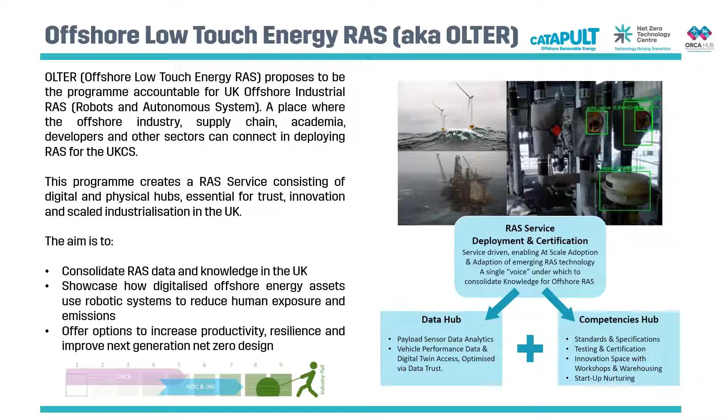No, thank you, Sakshi. And I think as well, if there are some more detailed questions, Andy Bell, who heads up the OLTER program for NZTC, we can take those questions away and get back through email afterwards. But that was a fascinating look at the OLTER program, and I, for one, am really excited to see how that develops over the coming years. So thank you very much, Sakshi.

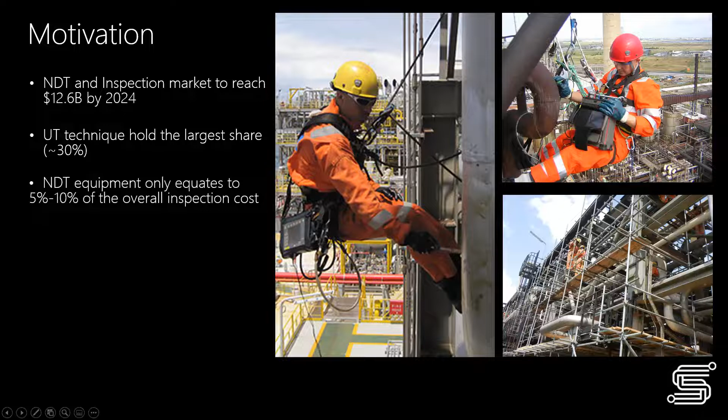The current market position and issues facing the industry: the NDT inspection market is set to grow to 13 billion by 2024, and around 30% of that is ultrasonic testing techniques. But in traditional testing scenarios, only 5 to 10% of the costs are associated with the instruments and technologies themselves. The major costs are associated with access costs or labor costs, like rope access or scaffolding.

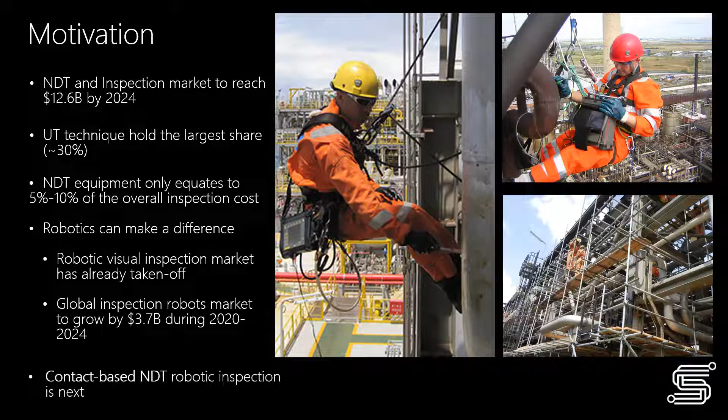So it is clear that robotics can help and make a difference. We've already seen the visual inspection market take off, and the global inspection robot market is set to grow by around 4 billion by 2024. The next logical step is essentially contact-based NDT inspections.

To walk you through the current technologies out there: on one hand, we have contact-based piezoelectric technologies, where a piezoelectric element generates ultrasound, using a couplant like water or gel to transmit that ultrasound to a structure to obtain inspection data. On the positive side, they have good sensitivity and are quite compact and light, but because you require a coupling medium, you need surface preparation, and they also have quite poor high temperature performance, which doesn't make them ideal for robotics implementation.

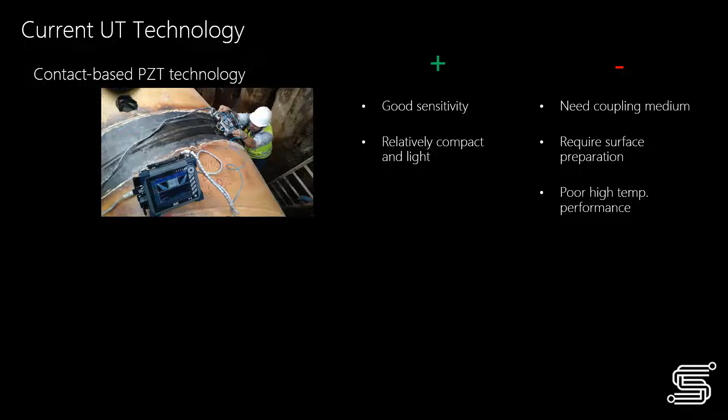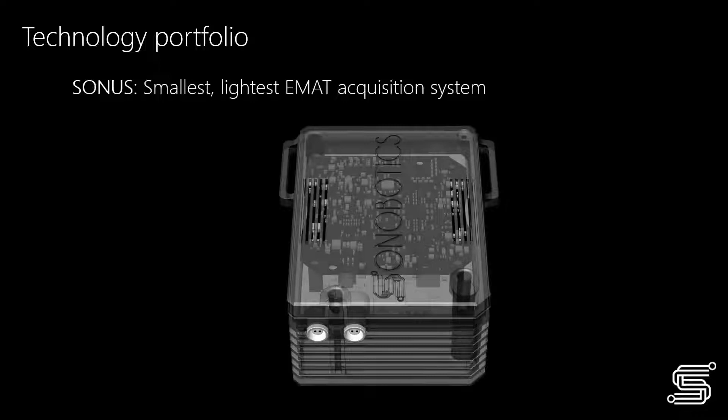Our current technology that is commercially available is Sonus, which is the smallest and lightest EMAT acquisition system on the market. It is ultralight, designed to be used on all types of robots, and weighs under 290 grams. It is fully wireless, transmitting all data wirelessly to a base station or a robot.

Because it's quite important for the robotics community to have that ultrasonic or inspection data readily available to be integrated in all sorts of ways, the system has a robotic operating system on board, which allows it to seamlessly talk to all robotic platforms working with the system. It has powerful signal processing and acquisition systems on board, so all data processing and signal acquisition is done on board, and the end result is wirelessly output to the robot.

It is very low power, so it can be quite light and small, and it is battery powered, making it ideal for implementation on platforms where payload is quite critical, such as drones. The system's capabilities include non-contact thickness measurement for corrosion mapping, and it has 2 independent channels which can be used for defect or crack detection. We're also working on adding capabilities for rapid structure screening from single points, without needing to scan the entire structure.

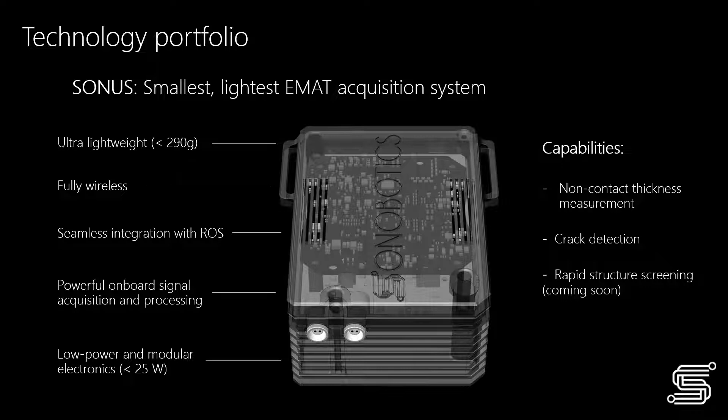So to go along with that acquisition system, we have essentially the sensor heads. Different types of EMATs are used for different types of inspection, for different needs. Let me show you the system being implemented.

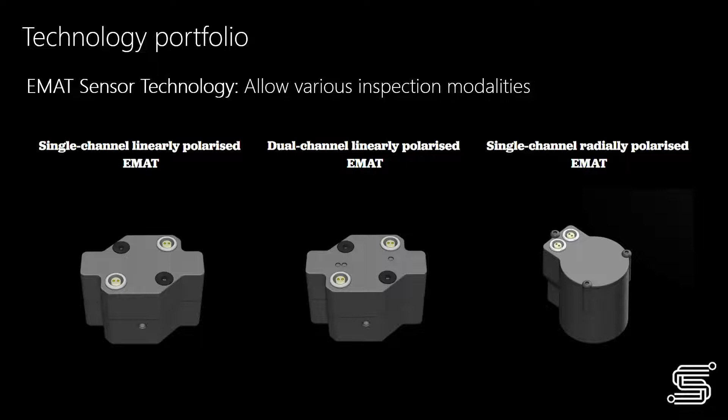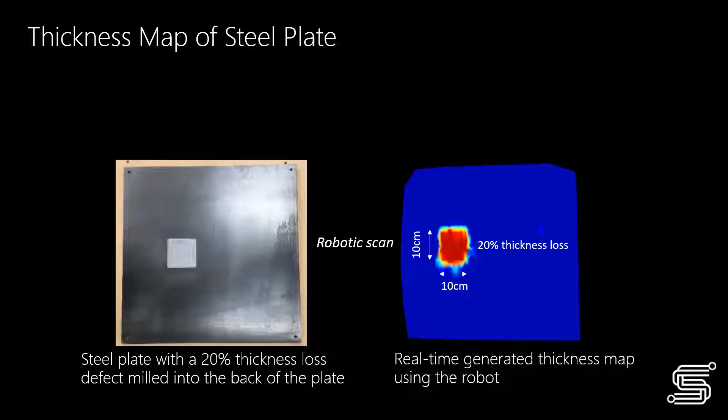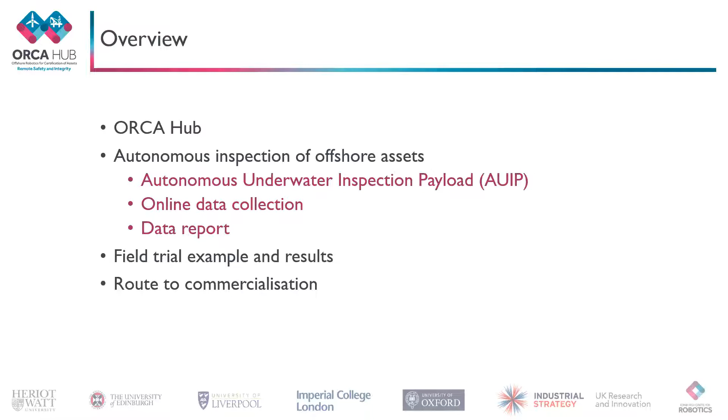Next, please. So the first line, if you go to Orca's webpage, says the Orca Hub is a multi-million-pound program aimed at addressing the offshore energy industry's vision for a completely autonomous offshore energy field. This is pretty much exactly what we are trying to do. We are looking at how to combine autonomy, path planning and control with mapping, surveying, and inspection to pretty much release a robot close to an offshore asset. Then the robot will do the complete inspection and return telling us it's done so we can retrieve it. This has multiple benefits: it can improve the efficiency of the inspection while reducing human risks as we move them to onshore instead of offshore, which also can reduce the cost and the carbon footprint.

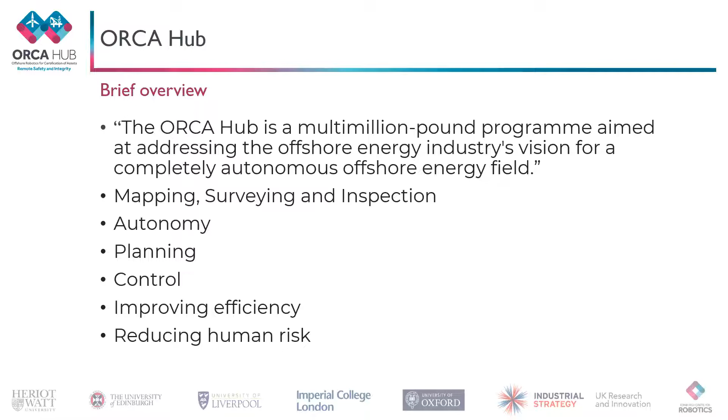Next, please. In this image, you can see we have a Falcon equipped with our autonomous underwater inspection payload, which is the yellow housing sitting below it. This housing contains a stereo camera setup, a DVL, a fiber optic gyro, an IMU, a pressure sensor, and in this case also a sonar. We can also attach any type of additional sensors to this, and we've also been using it with manipulators. It also contains additional computational and graphical processing units, so we can run all of our system online on board.

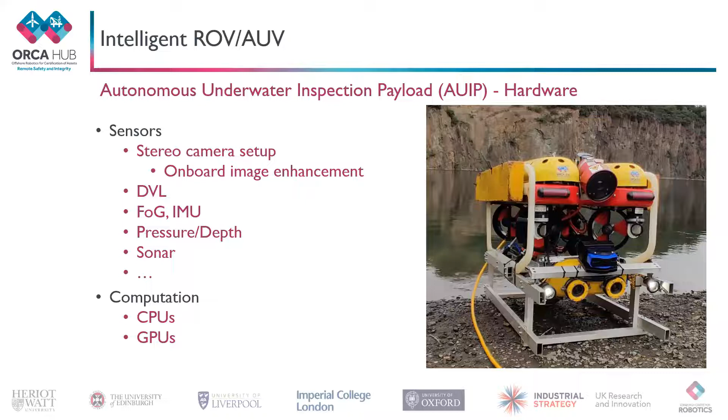Thank you. So one of our main software components is our simultaneous localization and mapping system. This is tracking features in the environment to create a map while it's localizing itself. It's doing this with enhanced images as well as dehazing, and this can increase our viewing range from what in the North Sea is probably a few meters on a good day to usually at least twice where the distance where we can still reliably track features. In addition to just tracking features, we integrate all the internal navigational systems and sensors, as well as doing an autonomous online calibration between all of these different motion estimators. So we don't need to have a precise model of how everything is connected to each other in the beginning, but it will figure this out over time.

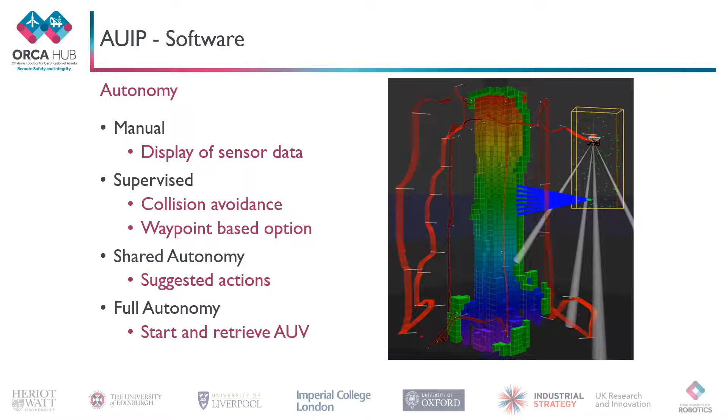Next, please. I think you skipped one. Yeah, thank you.

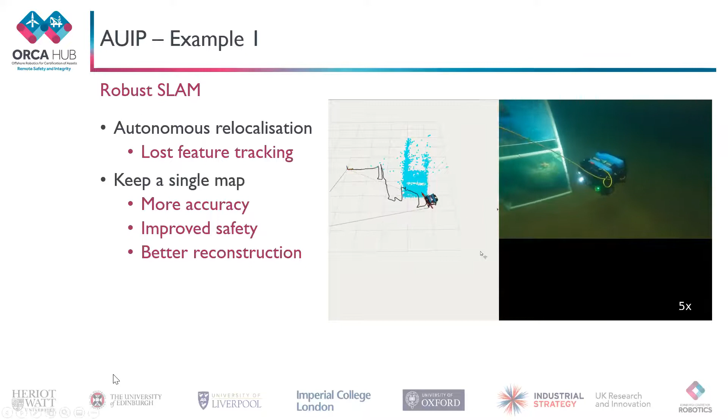One thing we've done is improve the SLAM based on having it work together with the autonomy. So if we lose feature tracking during operation, it is autonomously able to go back to a point where it thinks it has a good chance of relocalizing itself within a previous map.

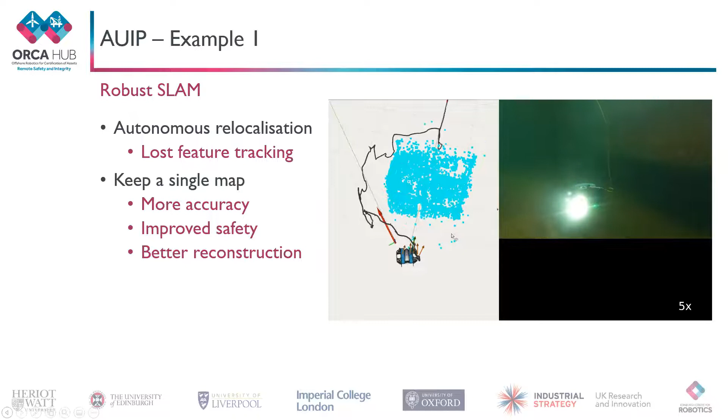And this has multiple benefits. The main point is to keep a single map of the environment, which means better accuracy, which in turn means improved safety because you know more precisely where objects are, so you won't collide with them. It's also beneficial for performing reconstruction in the end.

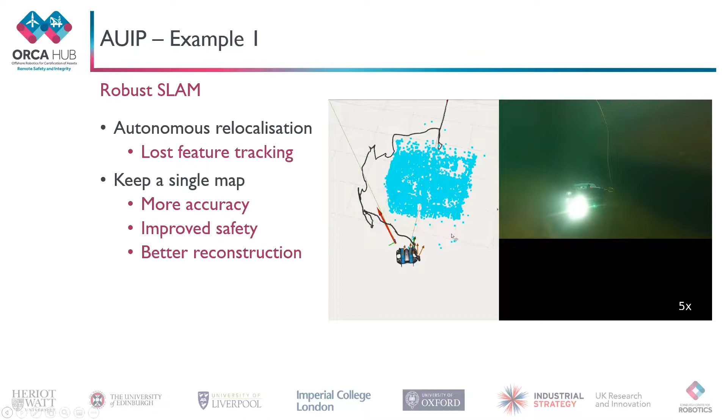Another example of what we're aiming to do in the end is shown here, where we do an autonomous inspection of an offshore wind turbine. In this example, the robot has no idea about what is around it. It just knows it needs to inspect something.

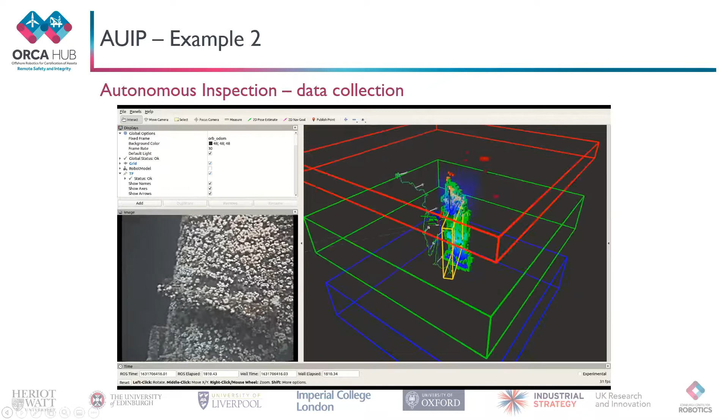So it is started close to an object, and then it will start to try to find out what it should do next to get new information about this object. Now you can see it jumped forward a bit in the movie, and it has started to map a part of this structure. It will continue doing so until it thinks it's done with the current task.

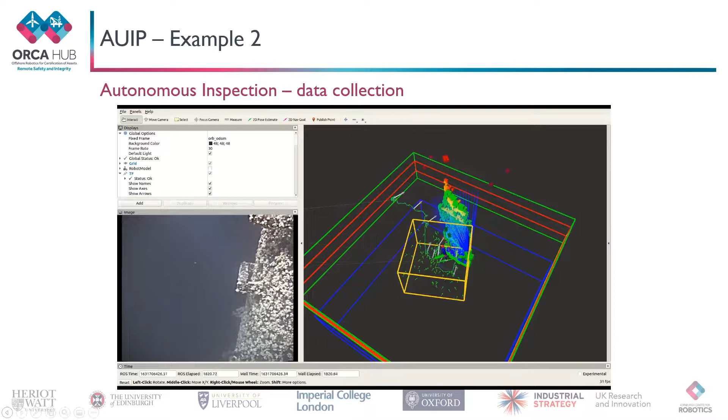Here we didn't do the whole thing because we had some issues with the very strong currents at the operation. It will soon move forward a bit where we see a larger piece of the structure has actually been mapped.

Here you can see the different suggestions the robot has made. So while it's in full autonomy mode here, an operator could also select one of these displayed poses if they think it's a better option to go to, and the robot will go there.

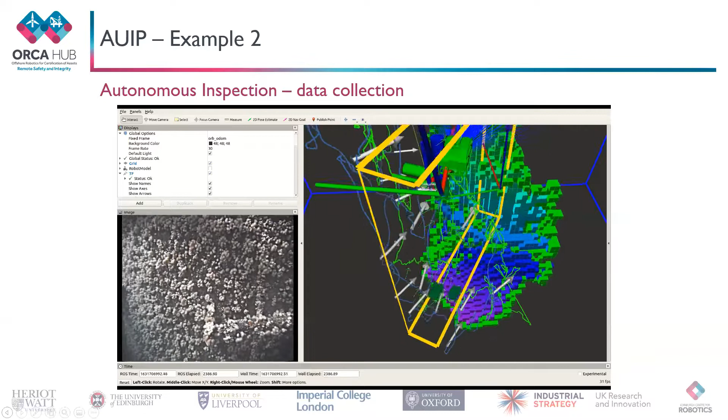So we can go to next, please. And from the same inspection, this model was generated. After the mission, what you're interested in is the data, and here is a 3D, up-to-scale representation of this with color correction.

You could then zoom in on the model, look at the very detailed parts of this, or measure the size of things by clicking and dragging or just clicking. We want to do multiple tests at the same point over time to be able to make some analysis about how the biofouling is changing.

Is there more corrosion somewhere? Has there been new damage, or has any of it grown so it needs repair? And how are the surroundings? Is the scour protection still good at the bottom, and so on?

And I think this would be very important to do, as we've seen last week on the east side of the UK, where we had massive storms damaging a lot of, changing the land a lot.

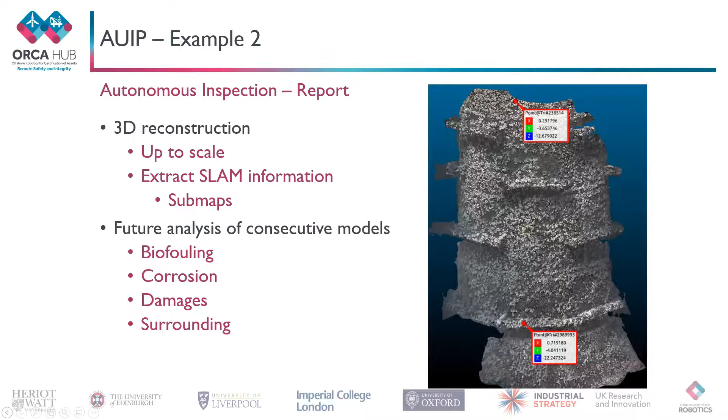Yeah, and thank you very much for this. No, thank you very much.

We're a subsea robotics startup based in Aberdeen, and we've also got team members in the US and the Houston area. We've got extensive experience in the field of autonomy underwater and on the surface, subsea intervention, manipulator control, remote operations, all of these good things. And we're developing next generation deployment and operations models for subsea vehicles.

I'm going to share a little bit about what we're doing as a company, but I'm also going to talk a little bit about the history of subsea robotics and some of the more general challenges of developing these next-gen technologies and deploying them, because we've learned a few things the hard way over the years. And related to this event, I'll touch on the value of the ecosystem that we've been talking about so far in the chat.

Subsea robotics is not a new technology to our industry. We've been using them for over 40 years. I've been working in this industry for 20 years and seen some amazing developments in that time. In the preceding 20 years, the real pioneers, and I was lucky to work with some of them, they really enabled a step change in how subsea operations were performed.

With this, the humble ROV, and we called them vehicles, but make no mistake, although they were human controlled, these were robots. They were a tool designed to support human efforts in these dangerous or inaccessible environments. So the humble ROV went from a diver assistance tool in the early 80s to, in the 90s, being an enabling technology for deep water developments globally. That's important to note. They were an enabling technology, and that's what really propelled them forward at scale and at pace.

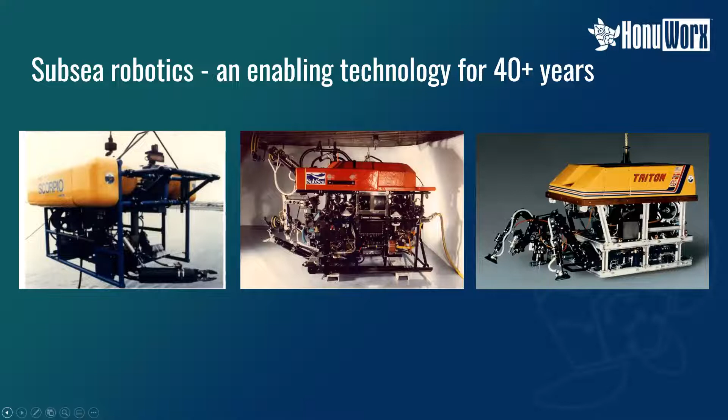The technology has continued to develop super fast. We've got vehicles that can go into even deeper waters. They can go further offshore. They can have more payload, more power, more tooling, more sensors. We've seen a move towards autonomy. Vehicles that can think and move for themselves, ROVs that can be piloted from shore, tasks that can be automated.

We did some incredible work when we were at Subsea 7 developing the AIV. We did that with a company called SeeByte, who were a spin out from Heriot Watt. So it's great to see groups like Orca Hub still continuing to push the needle today.

But despite all this fantastic advances in the vehicle tech itself, I would argue that we haven't seen an uptake at scale of some of these new robotics technologies. And even the existing tech, the existing vehicles are only modestly utilized. And we asked the question, why is that?

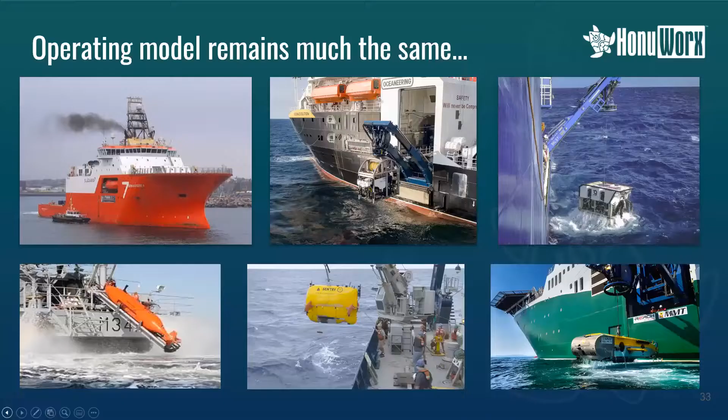Possibly you might argue that despite all those advances in the vehicle tech, the fundamental deployment or operating model has never changed. You get a big boat with lots of people on board and you splash the robot into the water, charge a day rate for all the kit and people on board, and typically mobilize for every eventuality you can think of, because it's expensive to get these systems out into the field. But that said, there's a reason we have this model.

It's difficult to deploy these vehicles through the splash zone. That's a huge technical challenge in itself. We've got very remote work sites, miles offshore, and we've got human operators and life support systems for these robots. It's an incredibly complex field.

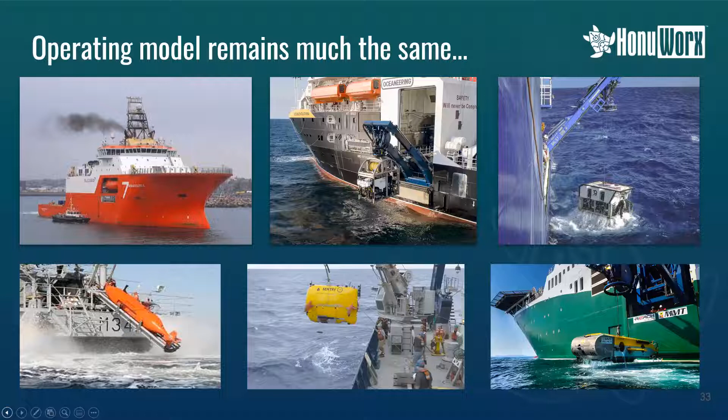But we've got a challenge on our hands if we want to scale some of these new subsea technologies further, in terms of cost and carbon footprint. The huge vessels are potentially no longer sustainable for some of those emerging blue economy sectors. And that's one of the arguments I would make, is that it doesn't matter how good the vehicle technology is itself, if it can't disrupt the model or the economics of these operations, or uniquely enable something we couldn't do before, like the ROV did, it remains an incremental improvement, and it's difficult to then commercialize that at scale.

HonuWorx was founded to change the model, not just develop the next increment. We're proposing a completely different approach to deploy subsea vehicles, because sometimes incremental change is not enough. We have to create an incentive to switch away from the established way of doing things.

There's a few things that underpin all of that. The submersible mothership itself, but the other pillars we're developing are this notion of onshore control networks. That's something we've been commercializing this year to support remote inspection in the North Sea, to connect the humans in the loop to the offshore work site and to this new deployment model.

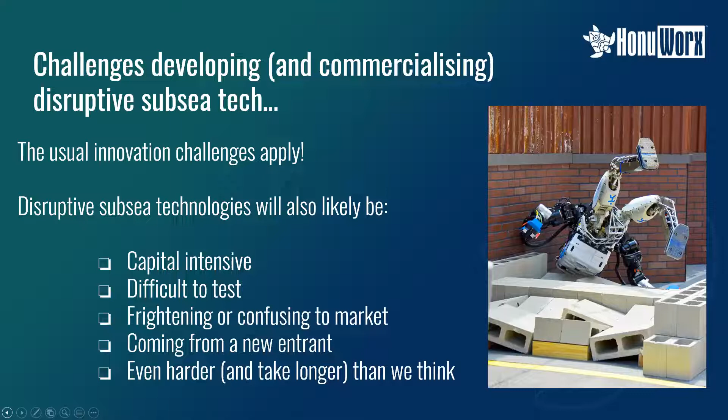We've talked to a number of bodies over our journey so far at HonuWorx. Sometimes it feels like there's too many people to talk to, but the support is there. There's so much expertise in this area, people that will give you their time. Some of these have supported us with use cases, networking, etc. And some of those 30-minute phone calls have been almost as valuable as the grants we've received.

So if I could sign off with one thought, it would be to encourage everyone that's either developing or looking to use these technologies to engage the ecosystem. We need that network effect. We need to share use cases, develop pilot opportunities, secure funding, and capitalize on that opportunity to create the next UK subsea robotics success story.

Thanks for listening to my rapid fire rant, and hopefully it was interesting.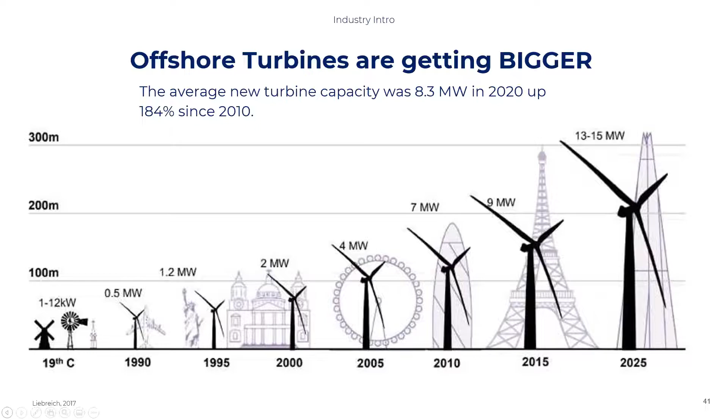And the reason this is important: the current solution for maintaining these wind turbine blades offshore is fundamentally rope access technicians, and this is not fit for purpose anymore. It's becoming outdated.

What we see is it's expensive and extremely dangerous. Owners, operators, regulators, and insurers don't want to be sending people out to these assets, especially as new wind farms are going to be hundreds of kilometers offshore. There's a huge skill shortage, and these costs continue to increase as turbines get bigger and further from shore.

There are some examples of where technology has been helping along the way. Drones, for example, are excellent at performing visual inspections of rotors and identifying potential defect areas, but they cannot repair. Working platforms are great for removing some of the risk for technicians, but they're bulky, involve expensive logistics, and aren't fit for a majority of activities.

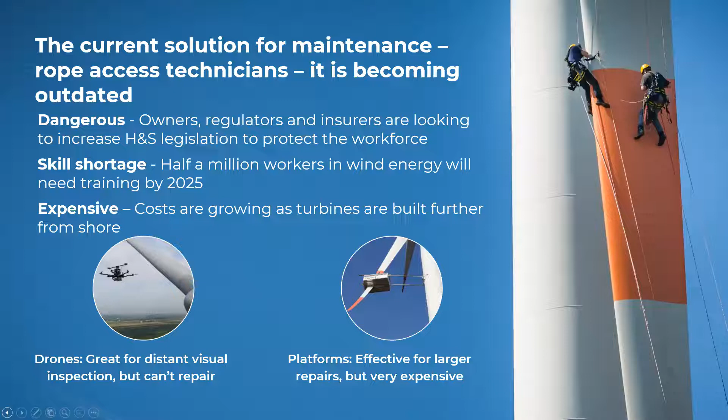To make things worse, offshore wind turbines themselves add major challenges for maintenance, particularly for robotics. These are isolated individual assets with numerous areas requiring inspection and repair. They have complex geometries, different materials—composite and metallic structures—awkward and confined spaces, and large numbers of repetitive tasks such as bolt inspection.

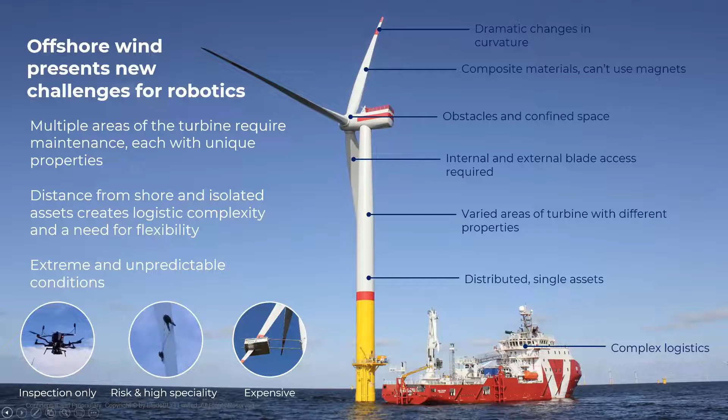So this is what we have done: we've developed Bladebug. This is the answer to performing repairs and detailed contact inspections safely using a robotic solution. It's a six-legged walking robot that adheres directly onto the surface of the wind turbine blade, enabling these detailed contact inspections and repairs to be carried out remotely.

This means you can do things quicker, reduce the shutdown time of the turbine, and overall improve the efficiency and profitability of these turbines. The robot is capable of working alongside technicians in a cobot configuration, but it's also more than happy to operate as a standalone and remote device.

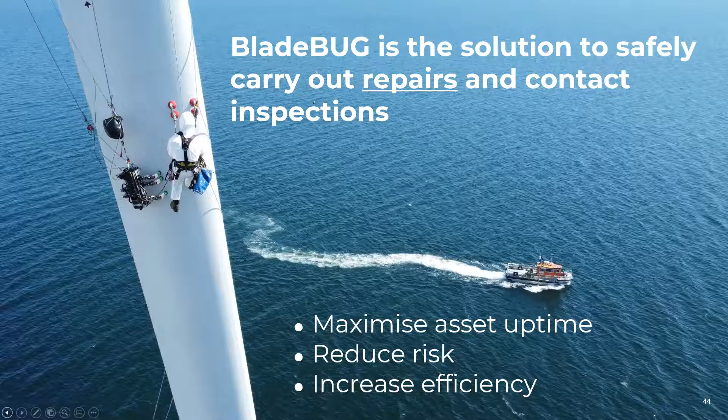So what is Bladebug? It comprises two fundamental elements. The first is a patented robotic platform, a six-legged walking device that adheres directly onto the surface using vacuum cups. We have highly articulated legs that can adapt and conform to the changing geometries you see on a wind turbine blade.

This means it's not limited to just the blades. There are other areas of the turbine the robot is capable of operating on. Secondly, within this robot we have a modular tool payload, so we are essentially agnostic to what the robot is able to achieve, be it inspection or repair. This tool-agnostic approach is great for future-proofing the design, because new tools and sensors can be very easily retrofitted to the robot, and suddenly it's capable of performing different activities without any changes to the platform itself.

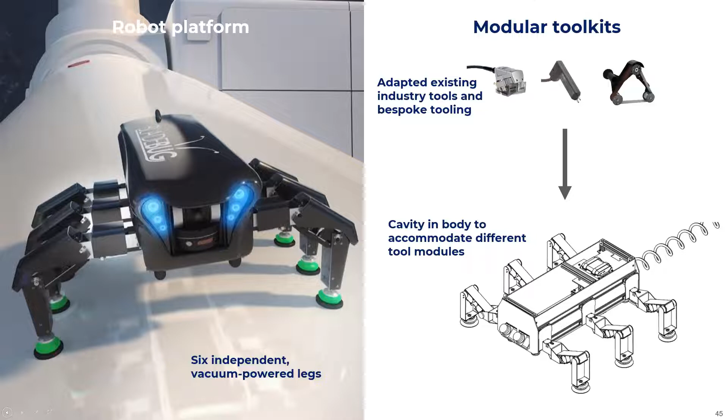One of the unique selling points of Bladebug is this ability to conform and adapt to different geometries while maintaining a constant walking gait and locomotion. This agility and flexibility enables the robot to walk on a blade, inside the blade, at critical areas such as the leading edge, but also inside the tower, for example.

We're currently working on a project with GE Renewables where we're using the robot to walk around the circumference of the towers at the bolted flanges, using existing ultrasonic inspection techniques to measure the tension within the bolts.

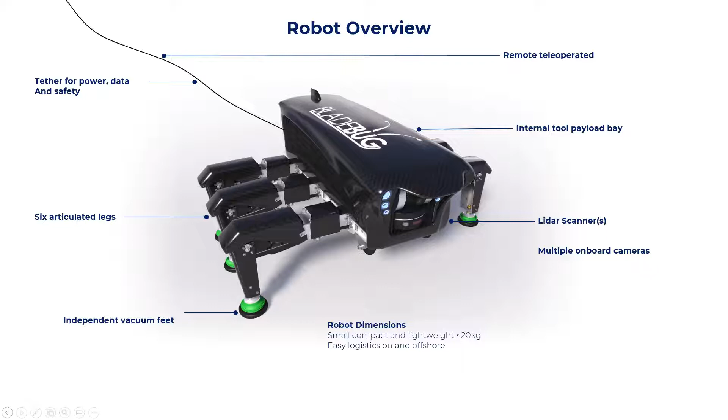As an overview of the robot, it's a teleoperated device, remotely controlled, so you have a very simple system to maneuver it. While the robot itself is complex and very clever, actually operating it is a low-skilled task. We have a tether providing power, data, and a safety line connection, and multiple degree-of-freedom legs that enable adaptation to different surfaces. Because we've designed it for the offshore environment, we've made it small, compact, and lightweight to remove any concerns about logistics.

The robot has been designed with the end user in mind, enabling precision control with a low technical skill level to operate. This versatility means more tasks can be performed, including using tools alongside technicians for highly repetitive tasks like cleaning and sanding, but also highly skilled tasks such as repairing cracks and filling areas on blades, by upskilling staff who aren't rope access trained but can now perform activities on blades. This will lead to further innovations to improve turbine efficiency, like applying new coatings, working without human intervention as part of this ecosystem of autonomy.

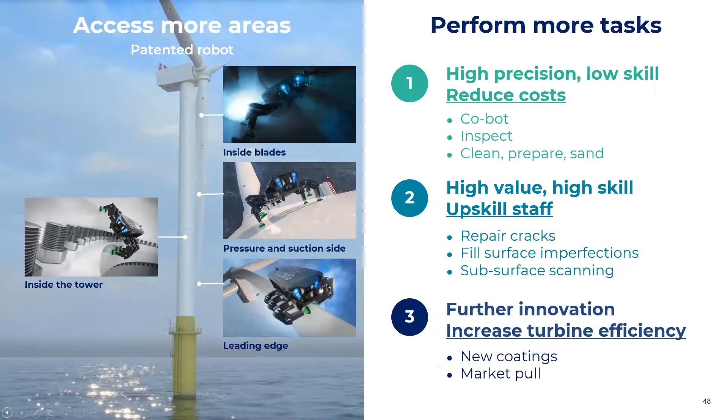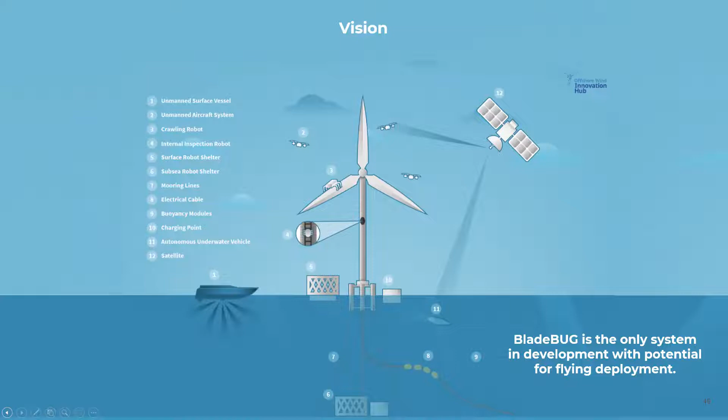To bring you up to the present, we performed our first offshore wind turbine blade walk in November 2020 on the Offshore Renewable Energy Catapult's 7 megawatt turbine in Scotland. This was the result of 3 years of hard work with the catapult, testing on all their facilities from a single cup to the full-scale robot we have now. We're currently performing pilot trials over the next coming year to get it into commercial activity. So I apologize for running over, but that is Bladebug in a nutshell.

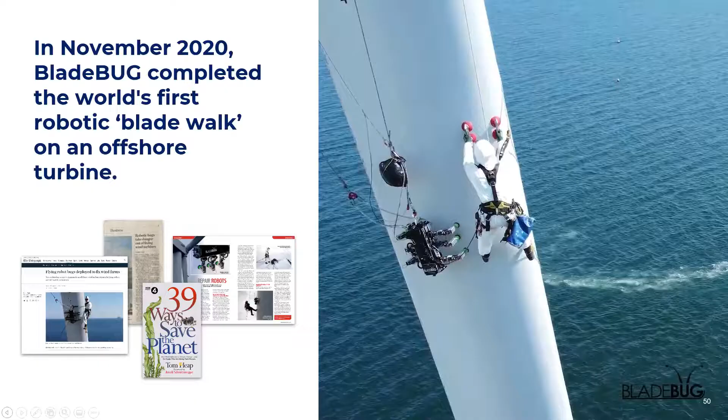No, sorry Alex, I had to rush the last bit, I lost track of time. Not at all, Chris, not at all. Thank you for a really interesting look at Bladebug, and for those who haven't seen it before, it's a really exciting technology coming through. We'll come back to you in the Q&A to explore in some more detail.

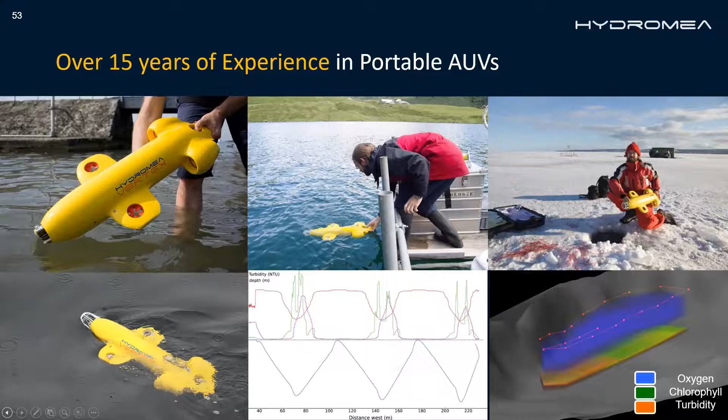Last year we joined TechX, and we had a great time talking to a lot of people in the industry in Aberdeen, trying to find the best places where we can apply our expertise in robotics and communication. And now, this year, we are focusing on remote inspections with a wireless drone which we developed.

So the problem that we identified, which we heard over and over again, is that inspections offshore are inefficient. You need, as Lee already mentioned, these big ships - they're very expensive to run, very expensive to mobilize, and it takes a long time to get out there. This clearly has to change to make this sector sustainable and more cost efficient.

So we see a trend towards resident autonomous vehicles, and especially for us, we see a lot of opportunities for very small scale vehicles, because most of the time having a look is all you need to do initially, and then you want to decide if you actually have to mobilize bigger equipment to do repair work. But for a lot of jobs you don't need that - you just need a visual inspection tool or some sensors on location. That's what we're working on now.

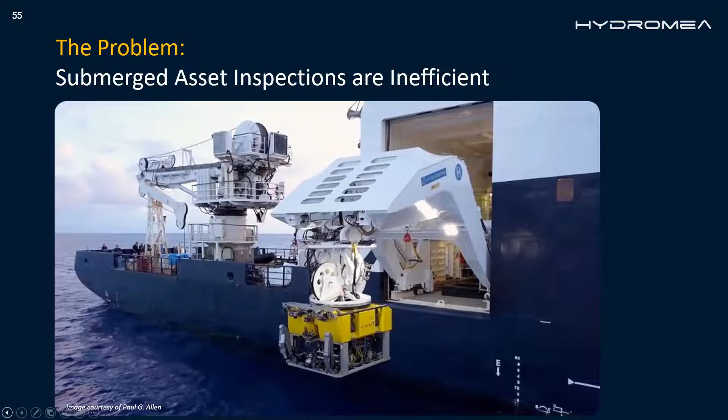This is EXRAY, our current wireless drone, the first wireless miniature drone underwater based on optical communication, doing live video streaming within about a 50-meter radius around an access point. That really frees us up to inspect very complex infrastructure with a lot of pipes and valves and things in the way where a tether would easily get snagged.

So currently we're focusing on confined inspections, confined spaces like ballast water tanks, or also within hydropower turbines, or other places where it's very tight and where a tethered vehicle would easily run into trouble. And then we will move further into open water operations later.

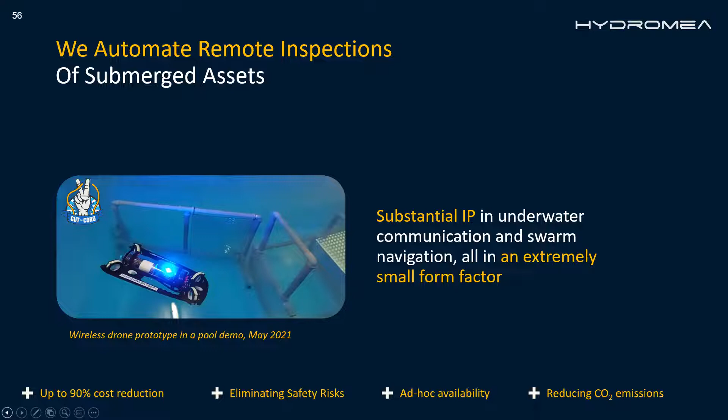So on the next slide we have our roadmap. At the moment, this year and next year, we're focusing on confined inspections - this is a remote controlled vehicle, but remote controlled via the wireless optical link. That already makes life a lot easier, because you don't need extra people to manage the tether, you don't have to worry about getting tangled or hooking up, or if you're in a ballast water tank, having to undo the cross stitch you've done with a tether flying through the space. Then the next phase, starting next year, will be to go into open water.

So we're targeting offshore and aquaculture markets, and we will enable the vehicle to navigate in larger volumes autonomously until it reaches the wireless access point, where you get the wireless video transferred. Then a human pilot can interact with the robot to guide the inspection. And once inspection is done, the robot can autonomously navigate back to a dock or recovery point, which is in line with what other companies are doing, like Oceaneering, just on a much bigger scale.

Our specialty is to make things on a very small and cost-efficient scale. To get a camera or sensor onto a location, you don't need a big vehicle necessarily. There's a lot of things you can do with very low-cost small vehicles.

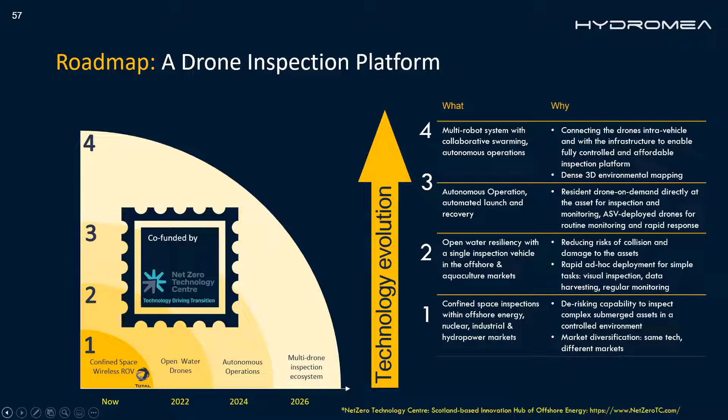So this is our technology roadmap. We have a few enabling technologies that we developed over the years.

The first one is maybe a little mundane, but very important. We developed a very compact underwater thruster, which we also offer as a product. It has no central hub, which makes it very robust against tangling. I have one here, if you can see the video — it's rim driven, and any debris gets sucked through the center. That makes the robot much more robust against fouling, fishing lines, water plants, and so on.

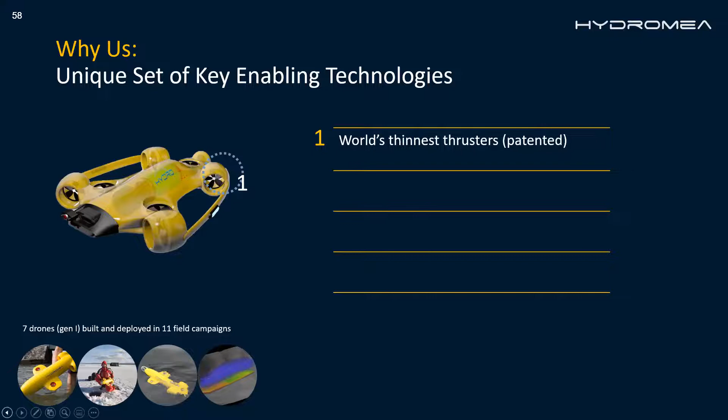Next, the technology I've already mentioned is that we've pioneered wireless optical communication, because we saw this as a major stumbling block — without wireless communication, you're always limited by a cable. Our current product, Luma X, offers 10 megabits per second over up to 50 meters through water, enough speed to transfer HD video in real time with very low latency. We're currently working with industry partners to push this into the offshore environment to install these at crucial sites, and we've seen a lot of uptake already just to connect to underwater sensors.

We have similar applications on a much bigger scale in the North Sea, with work-class ROVs wirelessly connecting to gyro boxes and other sensors used during installation of offshore equipment, to get live feedback of the orientation of the manifolds being installed. This has been very helpful in giving real-time data to operators to see what's going on, without having to worry about cables or other inefficient methods.

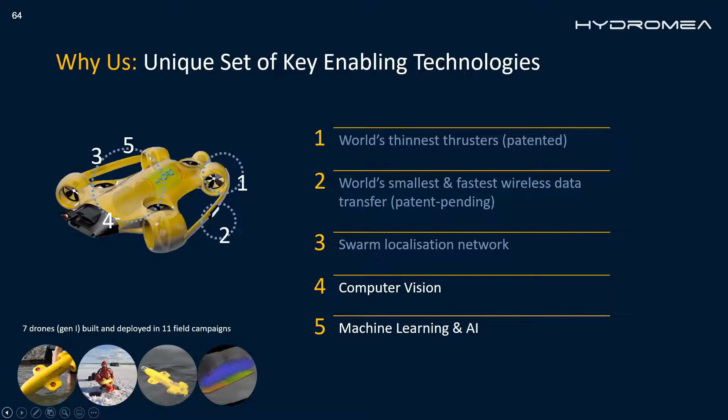And also, last thought - we are welcoming partners and pilot customers next year, because we are actively looking for opportunities to trial this in different industries. So if people have ideas where any of this can be useful, please contact us.